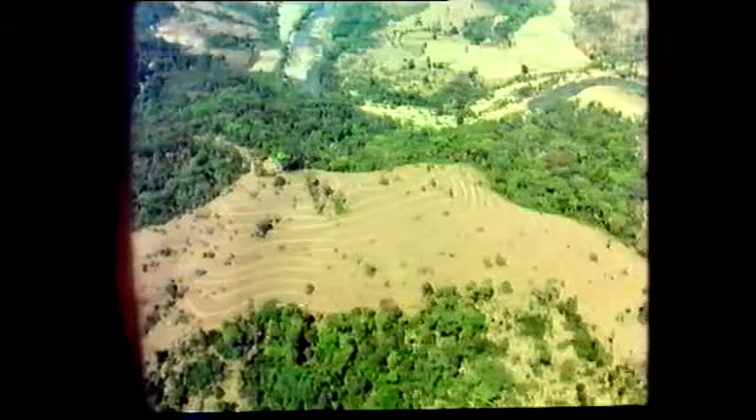Kudremukh has an ancient history, which goes back to the days of the Ramayana. When Hanuman set out in search of Sita, he was advised to seek her, among other places, in Ayomukh, rich in minerals. In modern times, iron-bearing formations were identified here in 1913 by the late Sampath Iyengar, geologist of the state of Mysore. After Mysore was reorganized as Karnataka in 1956, further geological investigations were conducted in 1963-64.

India ranks 4th in the world in its iron ore reserves after the USSR, Brazil, and Australia. These reserves are estimated at more than 21 billion tons, sufficient to meet domestic needs and for export for many years.

In southern India also, iron ore is found, but the Kudremukh ore is of low grade. In the series of magnetite quartzite deposits situated along the southwestern coast, the southernmost ore bodies contain more magnetite. To the north, extending into the territory of Goa, the deposits contain more oxidized ore and are of a higher grade. The lower grade ore here, containing some 37% iron, remained undeveloped until recent advances in technology made it possible to process the low-grade ore.

It was found uneconomical to process the low-grade iron ore for domestic use. So, the best way to exploit this national resource was to enrich the ore and export it to countries in need of iron ore. In early 1966, the National Mineral Development Corporation, NMDC, a Government of India undertaking, acquired the Kudremukh iron ore reserves. It covered an area some 6 kilometers long and 800 meters wide.

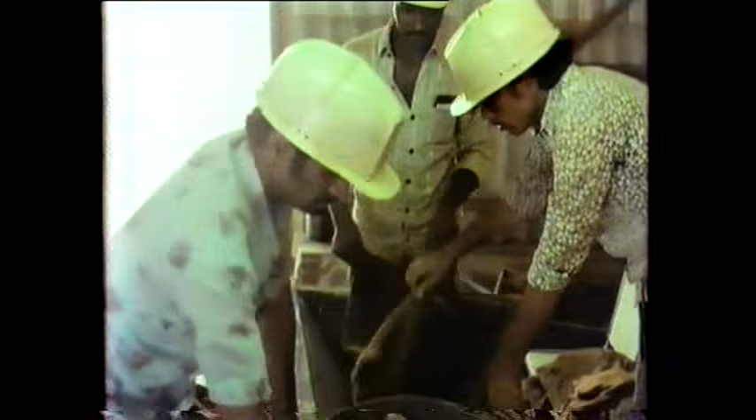In December 1968, the NMDC commenced an 18-month program, including pilot plant testing, jointly with an American company and a consortium of 3 Japanese companies. A feasibility report was prepared. It recommended an annual production of 7.5 million metric tons of iron ore.

It also recommended the transportation of this ore in slurry form to the nearby port of Mangalore. The slurry was to be carried in slurry tankers to Japan. But the consortium pulled out of the project in 1974, and the Indian government started discussions with the Iranian government.

Iran agreed to provide a loan of $630 million towards the cost of the project. Under the agreement, Iran was to buy the entire iron ore concentrate mined here for a period of 20 years at an average rate of 7.5 million tons a year.

This was in 1976, and the first shipment of ore was to be made in August 1980. The entire project had to be completed in just 4 years. This was a challenge which was intimidating, but it was accepted.

In April 1976, the Kudremukh Iron Ore Company Limited was established as a public sector undertaking to be administered by the Union Ministry of Steel and Mines.

After shopping around the world, a Canadian company, Metchem, were retained as consultants. They were entrusted with the job of planning, designing, detailed engineering, procurement of services, supervision of construction, erection, project management, start-up and operation of the plant during the first 3 years under the overall supervision of Kudremukh Iron Ore Company.

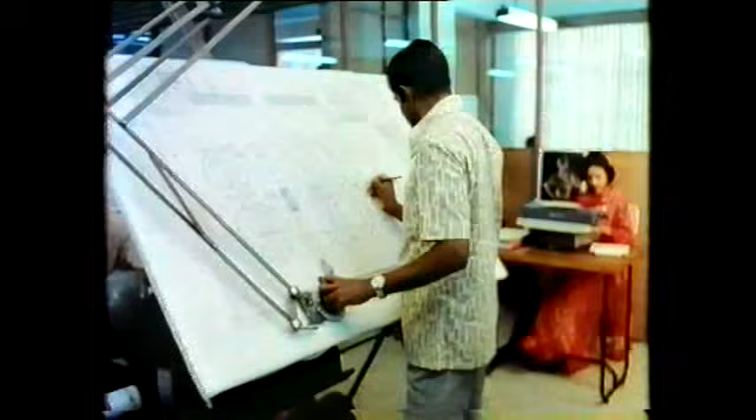Associated with Metchem were a number of Indian companies to do the detailed engineering, like Mekon, Engineers India Limited, Jayaprakash Associates, and Ho India.

The corporate head office in Bangalore became a beehive of activity. In order to speed up the procedures and decisions, hotlines of communication were established between Bangalore and Montreal, where Metchem had their headquarters. Hotlines also connected Bangalore with the project site at Kudremukh and Mangalore port.

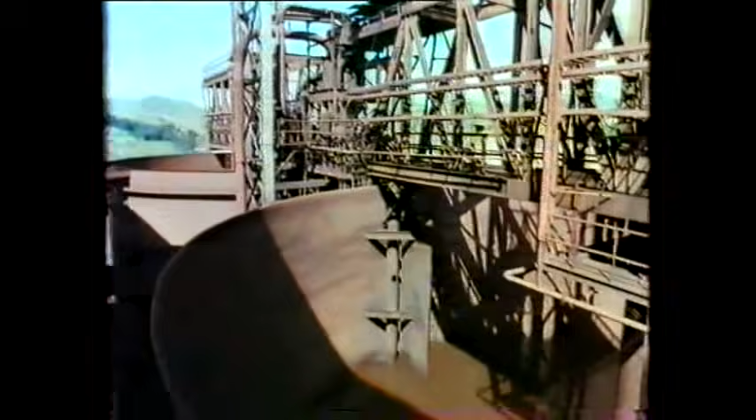The working force was quickly assembled from the steel projects already established in the country. These persons were highly skilled and were backed by years of experience in setting up and running sophisticated steel plants in the country. The following animation sequence shows the entire process involved in the project.

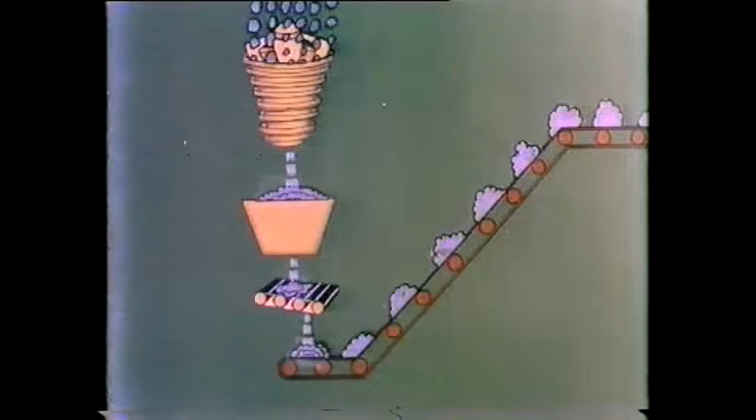The crude ore, with about 37% iron content, is drilled, blasted using up to 100 tons of explosives at a time, and loaded by shovels into dumpers for transportation to 2 gyratory crushers located separately. The crushed ore goes over conveyor belts to the Monsoon stockpile, where it is screened between coarse and fine.

Through separate conveyors, the coarse and fine material is conveyed to the silos in the concentrator plant. From silos, the ore is fed into 4 autogenous mills, each linked to a pair of 1 fine silo and 1 coarse silo. In the autogenous mills, which are large rotating drums, the coarse and fine ore tumble around with water and get ground.

From the autogenous mills, the ground ore passes to the magnetic separators, where the magnetite portion of ore is separated. The magnetic concentrate then passes through ball mills for further grinding and recycling.

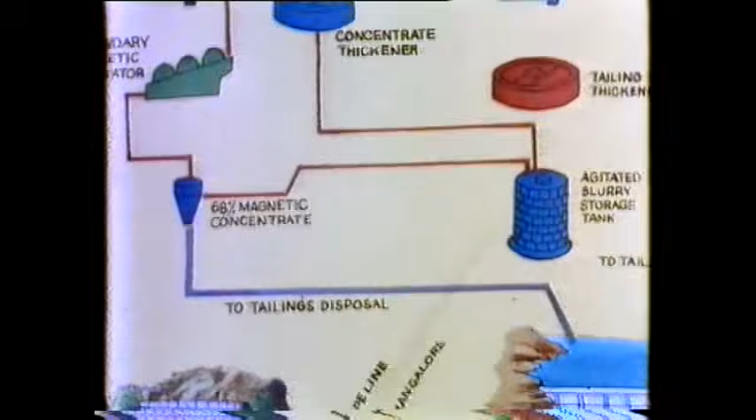The residual non-magnetic ore obtained from the magnetic separators passes through gravity spirals, where the major portion of the non-magnetic ore is recovered. The spiral concentrate is also reground in separate ball mills. The reground concentrates from magnetic and non-magnetic circuits are combined to obtain a concentrate of 66.5% iron.

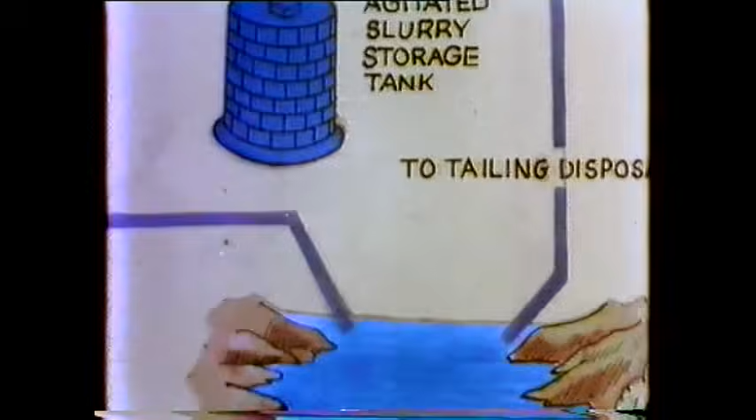The waste ore, called tailings, is pumped to an earthen dam across River Lakhya for storage.

The final concentrate is pumped to a height of about 35 meters onto the 67-kilometer-long slurry pipeline to Mangalore, where the slurry is filtered and stored. For shipment, the material is reclaimed and fed through large conveyor belts to the ship loader for loading into ships.

Since the whole project had to be completed in just 4 years, the planning had to be meticulous. The first concern was logistics.

All the sophisticated equipment needed for setting up the project had to come from the nearby port of Mangalore. A road was there, but it was 172 kilometers long and not capable of carrying heavy loads. So, a decision was taken to build a new 8-meter wide asphalt highway designed to carry loads up to 100 tons between Mangalore and Kudremukh.

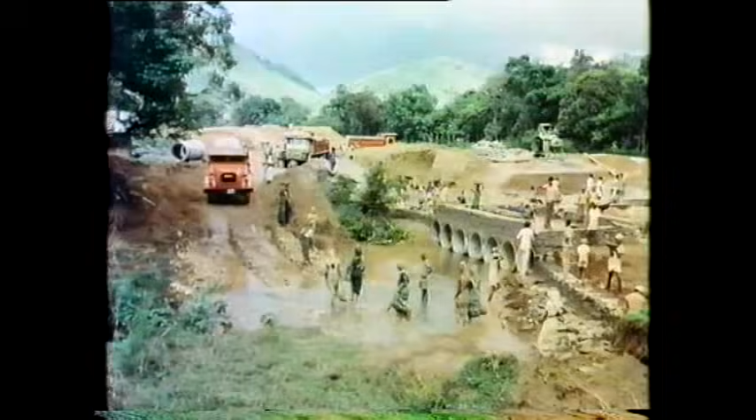This would also shorten the distance to 110 kilometers. The task was entrusted to the Karnataka State Public Works Department.

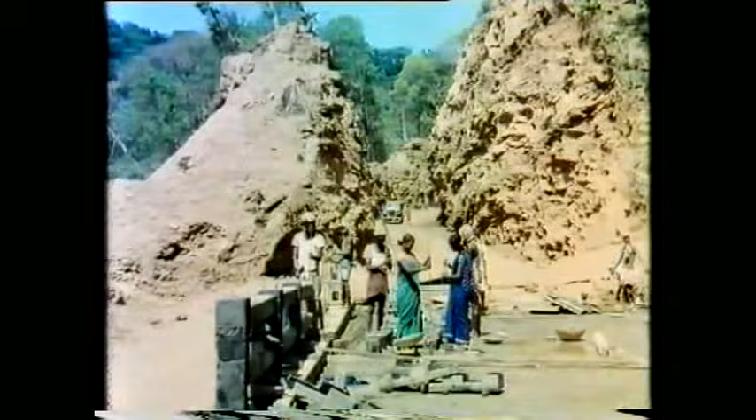But considering the stupendous task of construction of a highway through the thick Bhagavati forest, other organizations were called in to help. The Border Roads Organization helped in constructing some difficult stretches of the mountain road. It constructed 18 kilometers of road in the Mallur Ghat section, along with 9 minor bridges.

The construction agency of the Indian Railways undertook the task of constructing 4 bridges in the same stretch.

All this helped in getting the highway ready by February 1978. The completion of the road in record time was not only a tribute to the expertise of the various agencies, but also a tribute to the coordination by the project authorities of the work of these agencies.

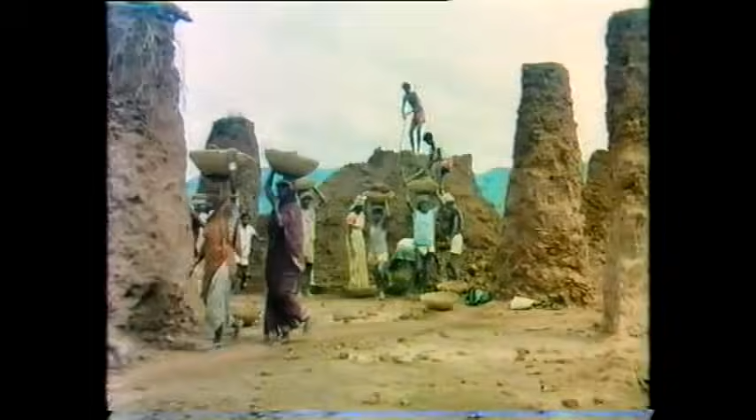While the road was being built between Kudremukh and Mangalore, work was going on in full swing at the project site. A notable feature of the project was the simultaneous planning and execution of several activities. The early work was basically one of laying down the best foundations for the major components of the project, for the concentrator plant, which would be the heart of the project.

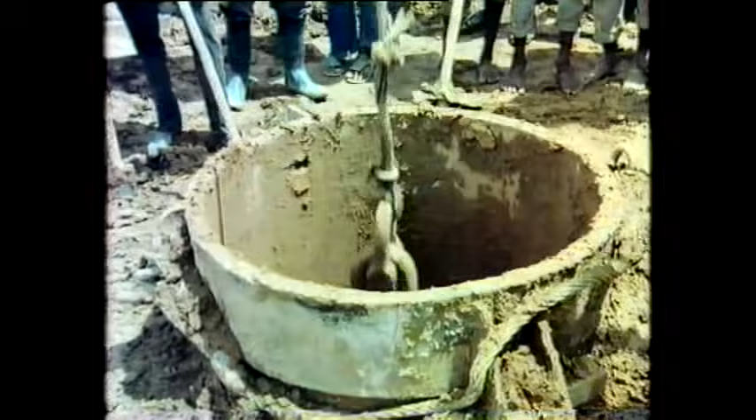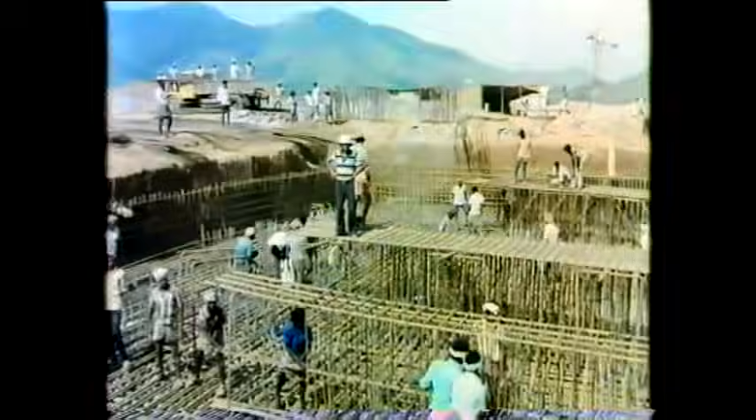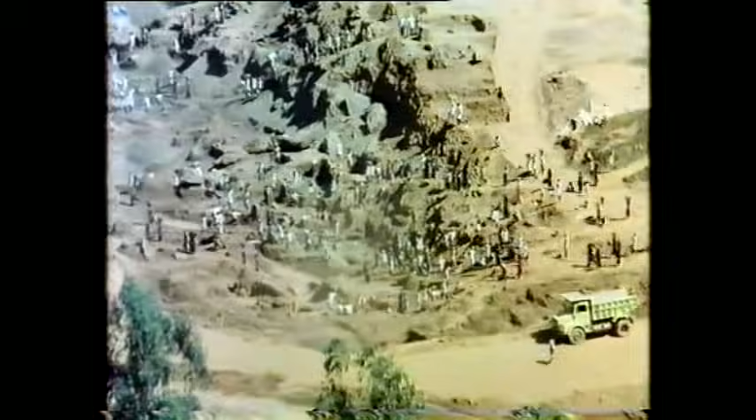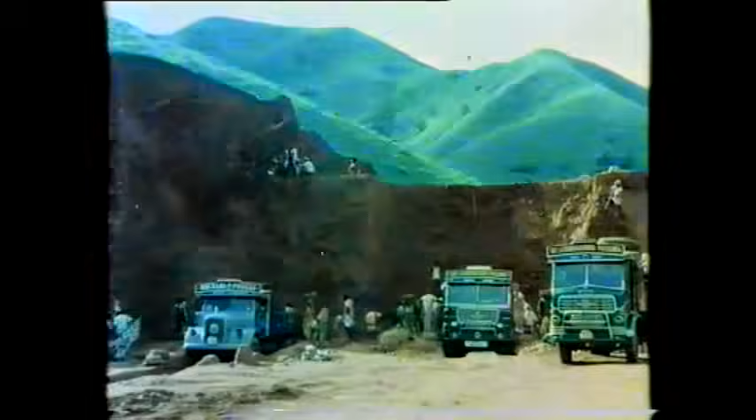For the giant silos, which would feed the concentrator plant. For the crushers, which would feed the silos. For the monsoon stockpile, which would ensure a steady flow to the silos. Warehouse, which would feed the project with all the spares and essential equipment readily and expeditiously.

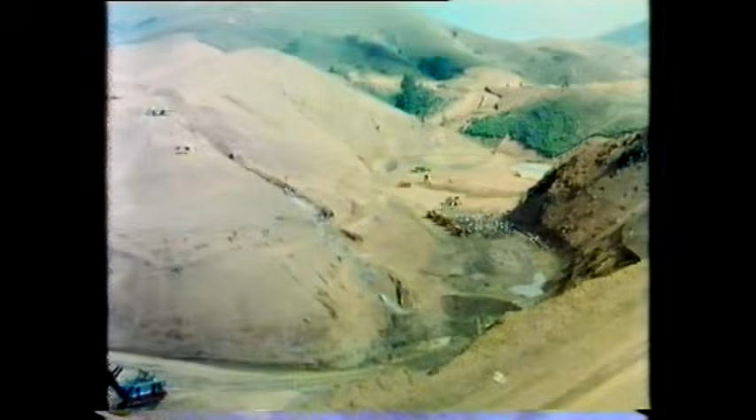One of the problems tackled by the project right in the beginning was that of pollution. The ultimate waste in the pre-beneficiation process, known as tailings, had to be disposed of properly to avoid pollution. So, a dam was needed near the concentrator plant. This was planned across Lakhya, one of the tributaries of the Bhadra River.

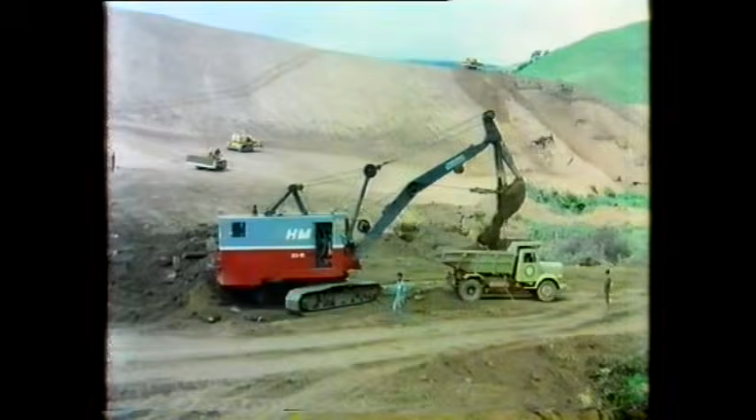An earthen dam connecting 2 hills, which would create a huge reservoir where the waste would be dumped. The catchment area would be 20 square kilometers, with a water spread area of 2.7 square kilometers. The dam itself would be 600 meters long and 65 meters high. The width of the dam at the bottom would be 313 meters and at the top 7 meters.

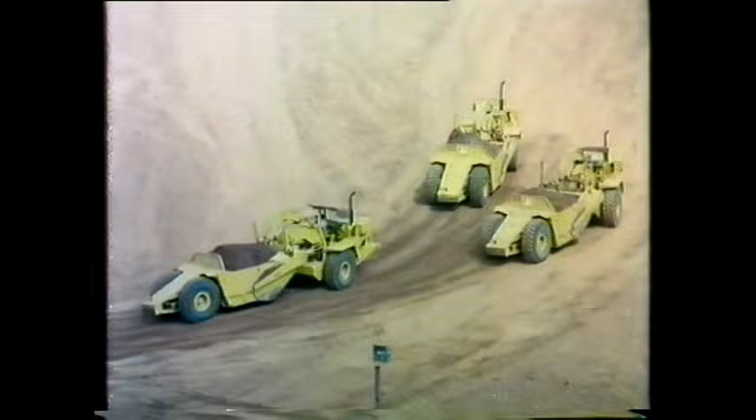The total storage capacity would be 63 million cubic meters of waste, technically called tailings. This would be enough for the first 10 years. Later, the existing dam's height could be raised or another built. The reservoir would also be a source of water needed at the ore concentrator.

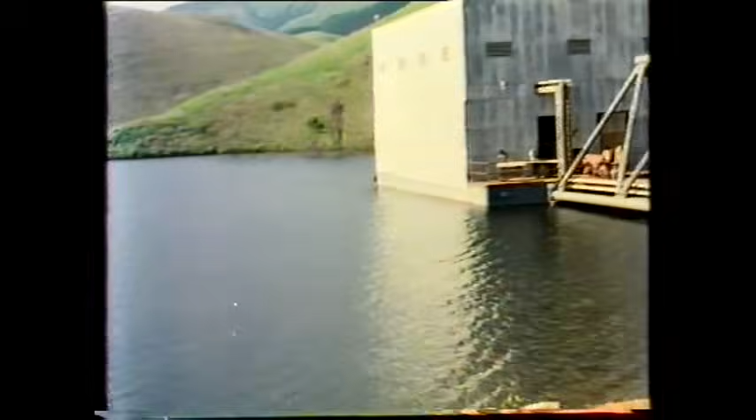There would also be iron ore waste washed on the mountainsides during the mining operations. So, 2 mini dams were planned to prevent this iron ore waste from flowing into the Bhadra river system. Along with the work on the Lakhya Dam, one of the first things the project undertook was the provision of housing for the staff working on the site.

Providing all the amenities of life in an area which was earlier practically cut off from the rest of the world was by no means an easy one. Even before the Kudremukh project was started, when the NMDC acquired these iron ore reserves, the regional inhabitants had to be rehabilitated.

A whole colony was built for them, including a school. In the early days, many of them had not gone beyond Kalasa, the nearest town some 25 kilometers away. Even this trip to Kalasa was for the limited purpose of obtaining salt and kerosene.

With a lot of costly equipment being used all over the site, and with thousands of men working, the need for security arrangement was not overlooked. The Central Industrial Security Force was entrusted with all aspects of security of the project.

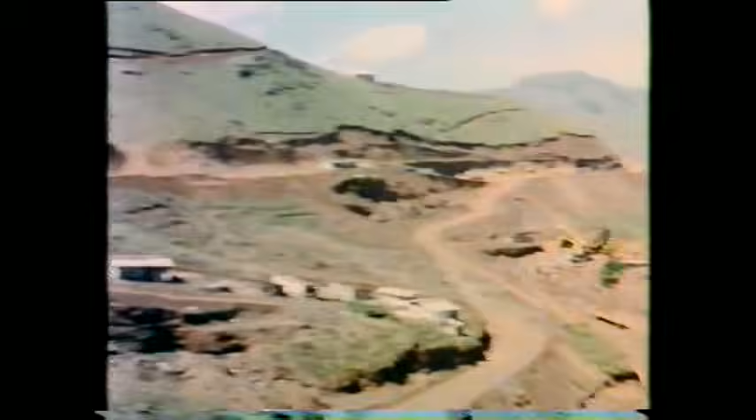One of the main hazards that the project faced was the ferocity of the monsoon. The area has a total rainfall of 7,000 millimeters for 4 months between May and September. Though there may be other places in the world receiving greater rainfall, it is distributed throughout the year and not concentrated during 4 months as in Kudremukh. This makes Kudremukh the 3rd wettest spot in the world. It literally cuts down the working period every year to 8 months. So, the 4-year construction period for the Kudremukh project really meant 32 months of effective work.

While the Lakhya Dam was being built in 1978, the monsoon turned out to be particularly ferocious. The rainfall was some 8,700 millimeters that season. Streams of water rushed down from the mountainside all around.

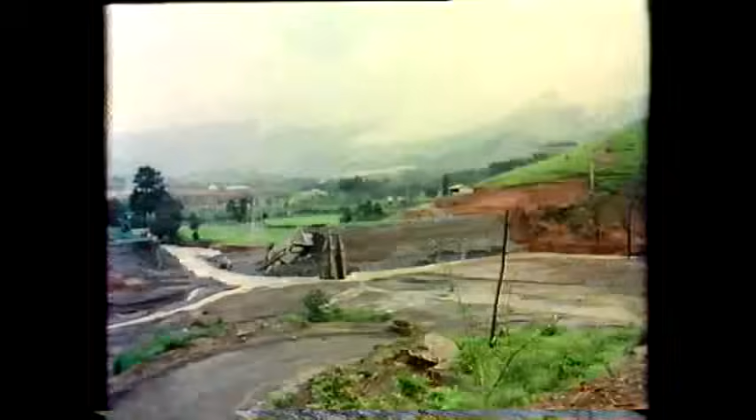Despite all these hazards, work went on.

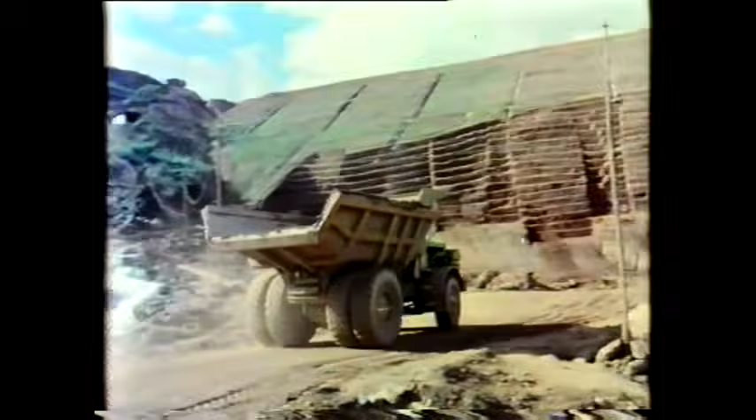The damaged portion of the Lakhya Dam was repaired and restored. It was completed on time, as scheduled, without any dislocation of the normal work as planned. The dam was inaugurated by the then Steel Minister of the Government of India and the Chief Minister of Karnataka.

In the nearby port at Mangalore, work went on to expand the facilities to enable cargo vessels to berth. This work was entrusted to the Mangalore Port authorities.

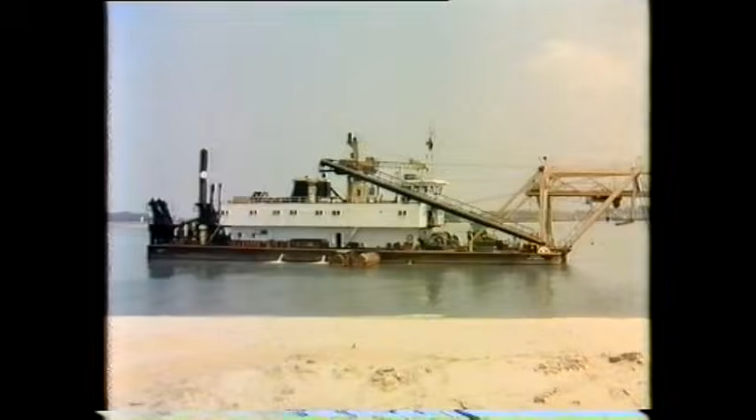Alongside, on the shore, a steel structure comes up for filtering facilities. Here, the slurry would be filtered and the ore concentrate separated and dewatered for being loaded into the ships.

The project undertook building of living accommodation for its employees in Mangalore also. Some 250 residences were put up.

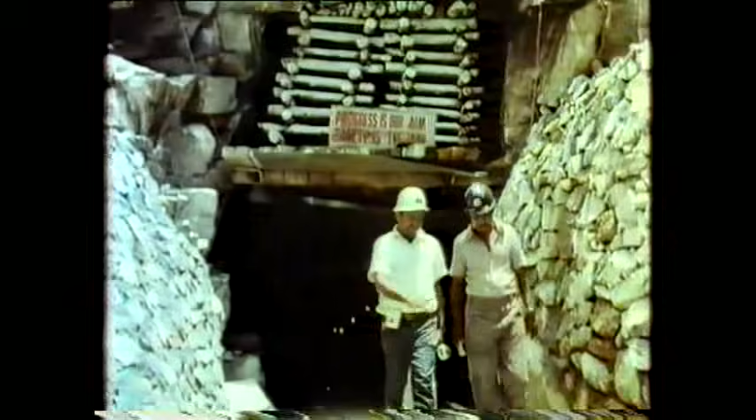The pipeline had to pass through a mountain. The task of cutting the tunnel through this mountain was entrusted to Asian Techs Private Limited, Cochin. The work on the 1.7-kilometer long tunnel started from both sides of the mountain and was completed in 400 days with dead match between the two sections.

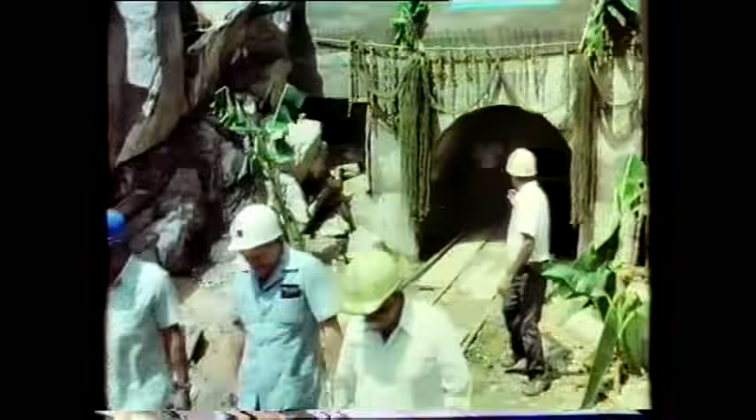This passed through a rain-soaked forest, crawling with leeches and snakes, not to speak of wild animals. There was not a single accident or injury during the construction of the tunnel. No mean achievement, this.

The total length of the pipeline is about 67 kilometers and passes through the dense Bhagavati forest. The pipe laying is done by mechanized equipment, which enables laying of 1 kilometer of pipeline a day.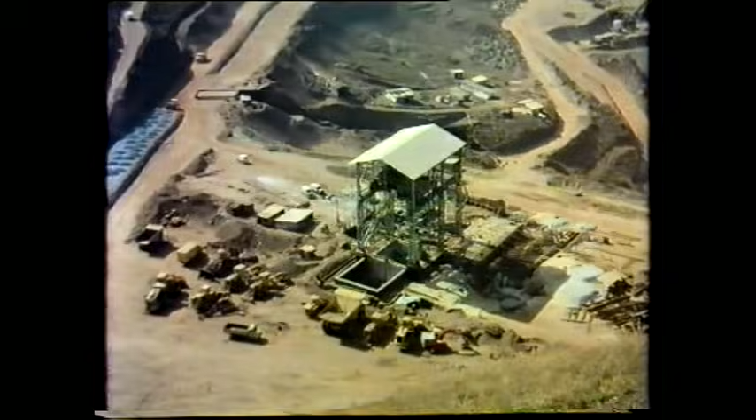In the meantime, the different components of the project were growing steadily and steadfastly. The crusher houses have their major portion underground rather than on the surface. This would be the place where the mined ore would be crushed and transported to the Monsoon stockpile by conveyors.

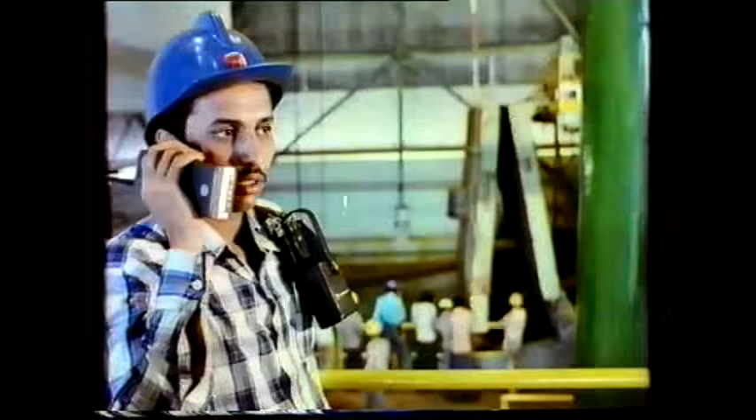A connecting conveyor system was put up to convey the crushed ore at the rate of 6,000 tons per hour to the Monsoon stockpile, 813 meters away. The Monsoon stockpile complex has a capacity to store some 500,000 metric tons of ore.

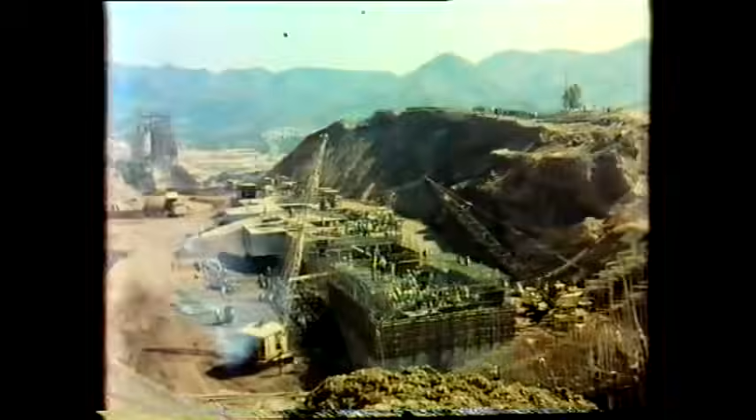From outside, it just looks like a huge circus tent made of steel. But the real activity goes on beneath.

A vibrating grizzly screen separates the fine and coarse ore, and the ore thus separated is conveyed to a transfer tower and then on to the concentrator plant. All this was built by the Hindustan Steelworks Construction Limited.

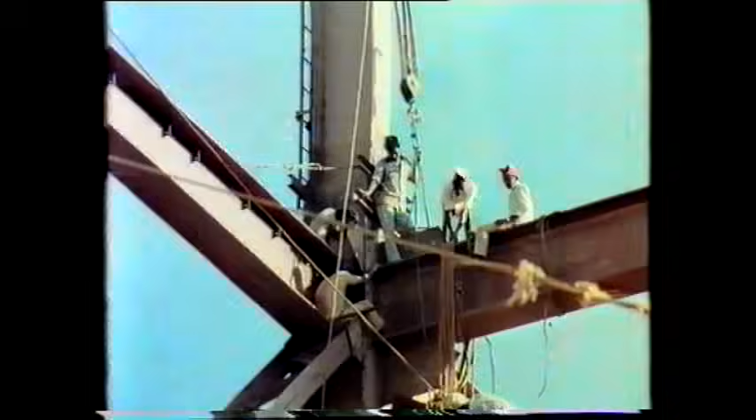The concentrator plant is the heart of the project. It is here that the crude iron ore is beneficiated, that is, enriched to produce concentrated ore containing 66.5% iron.

The most modern methods of construction were used for putting up this plant. For example, for the pile work, normal piling rigs were supplemented by an imported one with a telescopic arm, which could bore to a maximum depth of 42 meters. This saved some 4 months in piling work.

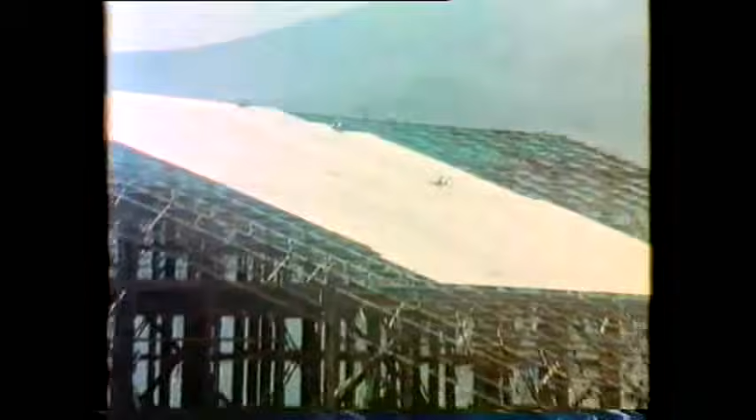Alongside the concentrator complex, there are 8 giant concrete drums, known as silos. 4 of these silos are 42 meters high, and the other 4 are 36 meters high.

These silos are cast by imported slip-form equipment. This is operated by a centrally controlled hydraulic system, consisting of jacks of 6 tons and 3 tons capacity. This enables continuous construction to the extent of 4 to 5 meters height every day. As the workers gain experience, they are able to complete 1 silo in 9 days.

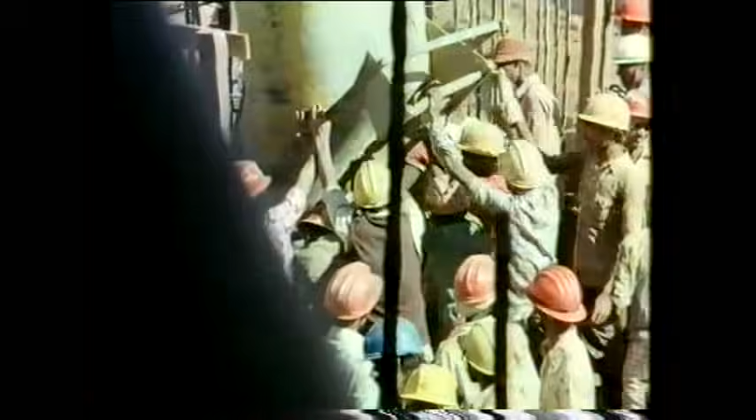In order to provide quality concrete at remote locations, mixers were imported from the USA. This obviated the need for establishing numerous concrete mixing stations, leading to considerable saving of time and money.

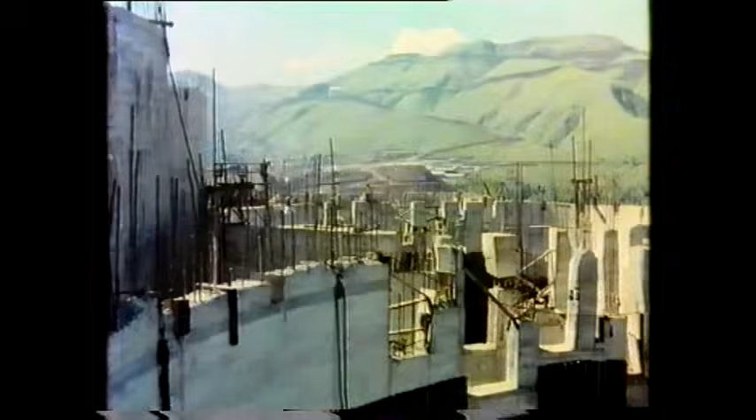The smaller size silo has a capacity of 8,000 metric tons of coarse ore. The bigger silo has a capacity of 10,000 metric tons of fine ore. The decision to separate coarse and fine ores before concentration is a result of the tests conducted in the pilot plant. Back on the mining site, entire hillsides in the mining area were covered by crisscrossing haul roads.

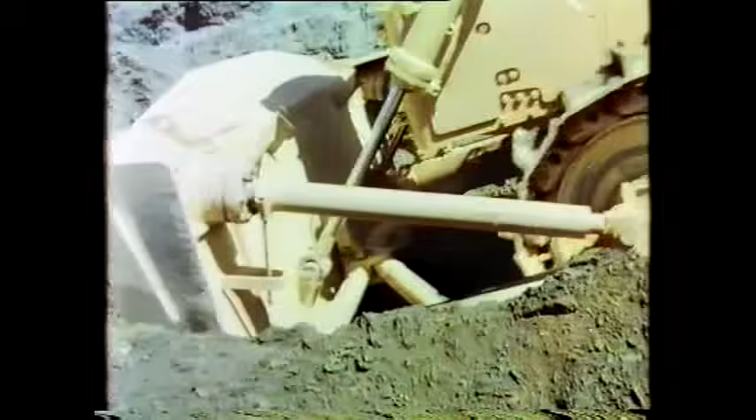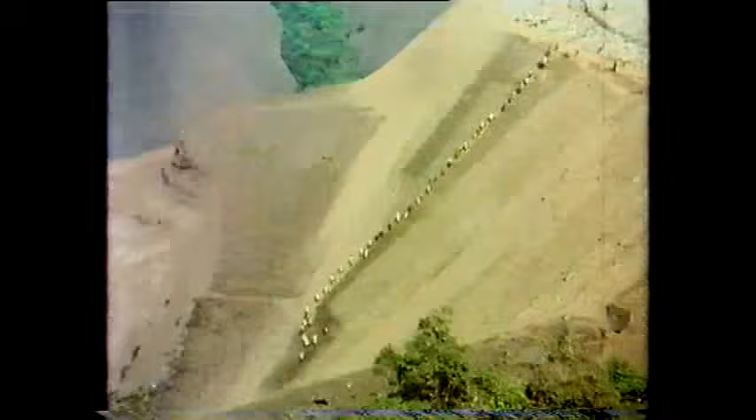These roads were able to take very heavy loads, like gigantic drilling rigs, massive electric shovels, and trucks. They were specially reinforced with stone aggregate up to 3 meters. The roads, 25 meters wide and covering an area of 5 square kilometers, were built by the company itself.

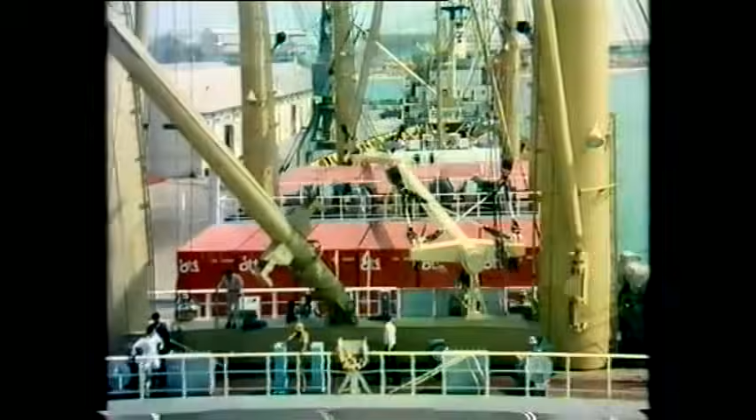The assembly of mechanical equipment at site is a time-consuming process. So, in order to save time, all equipment needed for the project was obtained in as near an assembled form as possible. For example, ball mills came from Japan in a single piece, each weighing 80 tons.

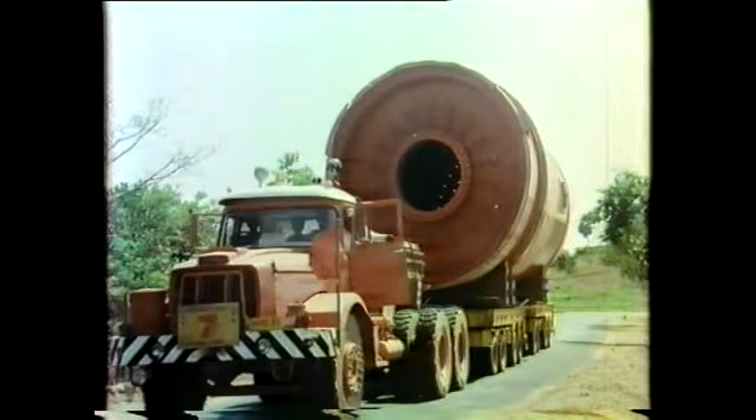Likewise, various parts for the autogenous mills, shovel components, and other equipment were all imported in bulk segments. The transport of all this heavy equipment to the project site was no problem, thanks to the new road built between Mangalore port and Kudremukh.

The main concentrator building involved a number of intermediate floors and slabs. Since construction with conventional formwork would have entailed delay, a system of left-in-place formwork was evolved. This form was termed Q-deck and was fabricated indigenously and utilized to great advantage.

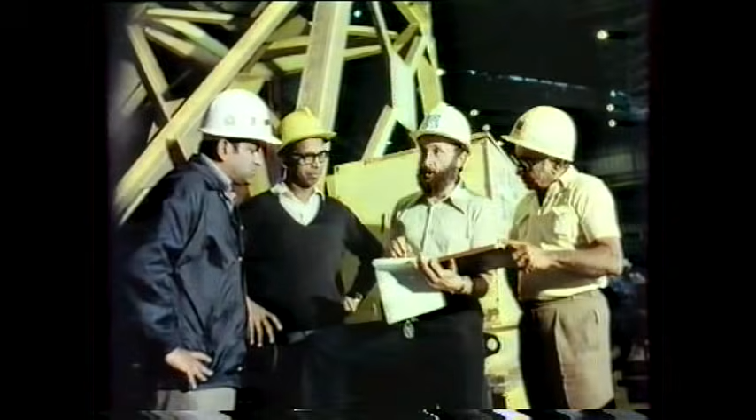The processing of ore, beneficiation as it is called, in the concentrator involves the separation of iron from other substances in the raw ore. First, the raw ore is ground in large mills, reducing the ore size to 1/20th of an inch. The ore is of two types, magnetic and non-magnetic.

Magnetic separators segregate the magnetic particles in the raw ore. But the non-magnetic particles have to be separated by a different process, called spiral concentration. The principle involved is that of gravity. The non-magnetic ore, being heavier than the other material in the raw ore, gravitates to the bottom and is thus segregated.

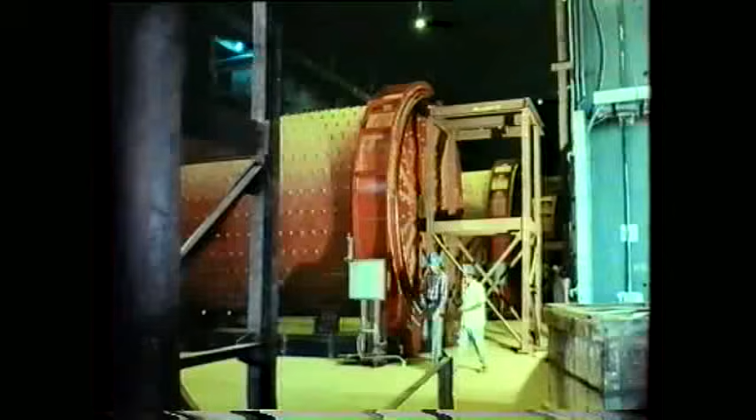Both the magnetic and non-magnetic concentrates are then reground in ball mills before being pumped through the slurry pipeline to Mangalore.

Sophisticated computer equipment was flown in from abroad. All operations at the project, from mining to the loading of ore into ships, are controlled by a large computer process control system.

While the system was supplied by the Foxboro Company, the application engineering was conducted by a team of Kudremukh engineers.

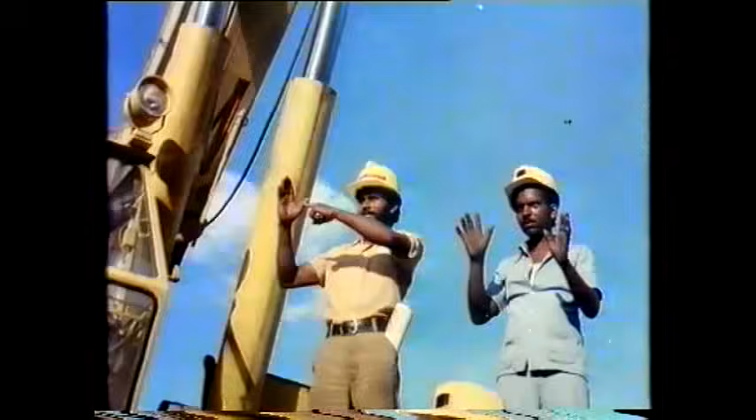Classification of stores was made a streamlined service. Within minutes of a spare being requisitioned, it could be made available.

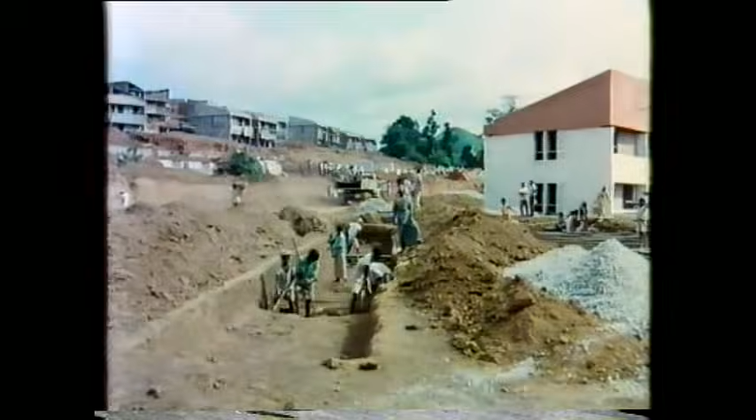Alongside the growth of the project, the welfare of the workers had received special priority. A regular township with more than 2,000 permanent residences had been built with all amenities, including facilities for recreation.

Modern schools for the children.

A full-fledged hospital equipped with modern facilities.

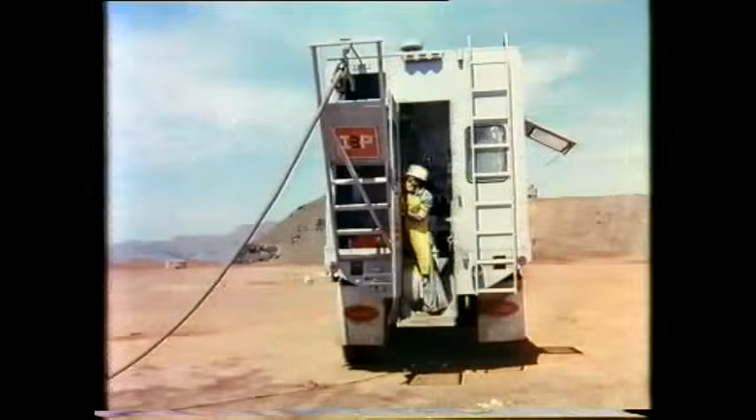They are fed with explosives in slurry form. All is set for blasting.

The blasted ore comes to the crusher house for crushing. There are two such crusher houses.

On each crushing unit, supervision is done by closed-circuit television.

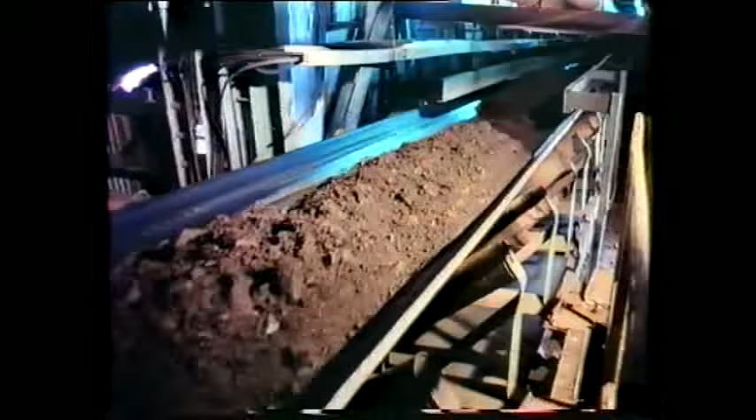The coarse and the fine ore are conveyed to the concentrator for recovery of the initial concentrated ore.

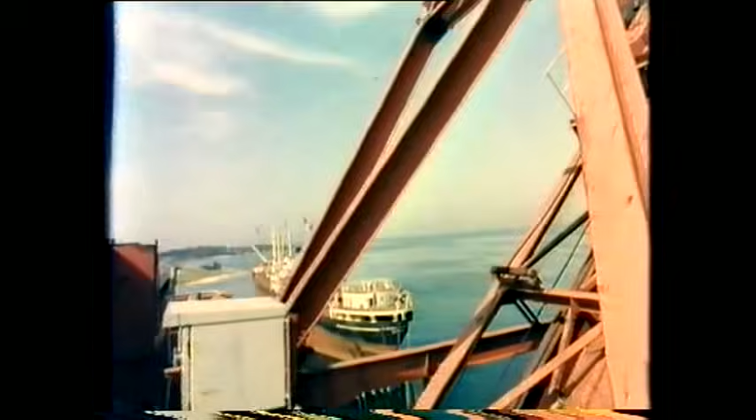Concentrated ore in the form of slurry is conveyed through the pipeline on its way to Mangalore port. This was on August the 22nd, 1980.

Seven hours later, on the morning of August the 23rd, 1980, at 7:15 a.m., the slurry was received at Mangalore port. It was filtered, dewatered, and was ready to be shipped abroad, absolutely according to the planned schedule, a worthy achievement that the nation could be proud of.

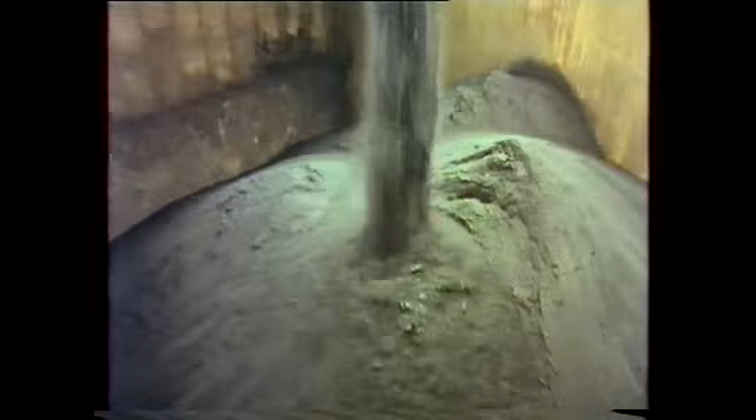All this precision and perfection was made possible by the computer process control system. It is a symbol of the efficiency of the builders of this magnificent project.

Karnataka has always been known for the splendor of the sculptures left behind by the builders of yore. The ruins at Halebeed speak eloquently of the temple architecture of the ancient Hoysalas.

The giant statue of Gomateshwara at Shravanabelagola is a marvel of sculpture which attracts people from all over the world. The Channakesava temple at Belur is known the world over.

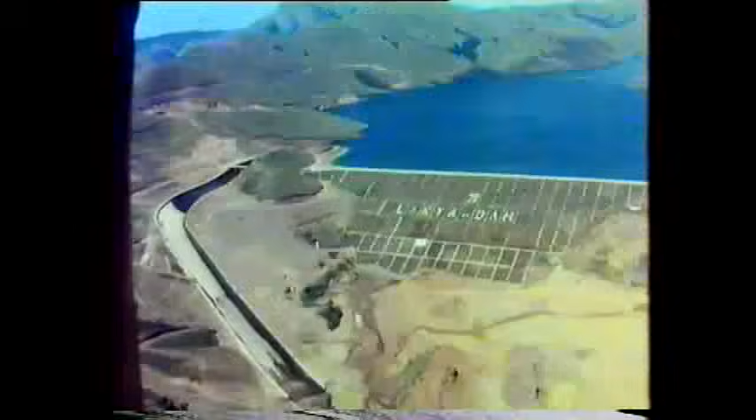Today, the Kudremukh Project is no less a monument to the skill of the people who have made it possible. If sculpture and architecture held sway during ancient times, today their place has been taken by science and technology.

What was a rain-soaked virgin forest has been converted into a modern township, bristling with activity to harness nature's gift in the shape of iron ore.

Unlike the ancient builders, the modern builders of Kudremukh have come from all parts of the country, from north and south, east and west. They belong to different religions. What has brought them together is a common endeavor.

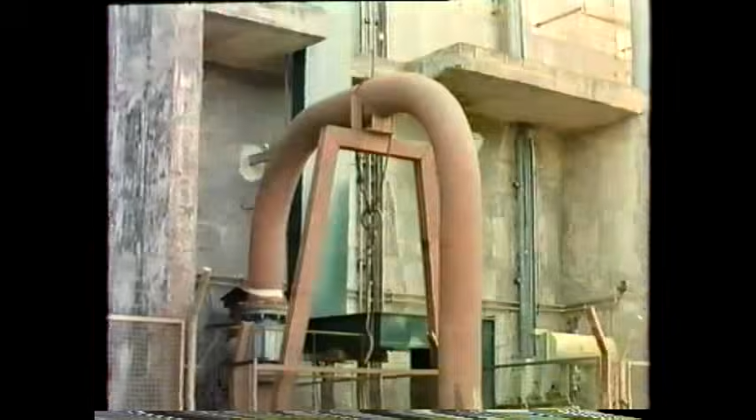Kudremukh is ranked as the largest new industrial development in the country in terms of capital investment. It is one of the world's largest new iron ore projects of the past decade.

What has been remarkable about the project is its completion on schedule under difficult conditions, and what is more, within the budget. In fact, there was a saving as against the original budget.

Kudremukh is a saga of skill, courage, and determined effort.